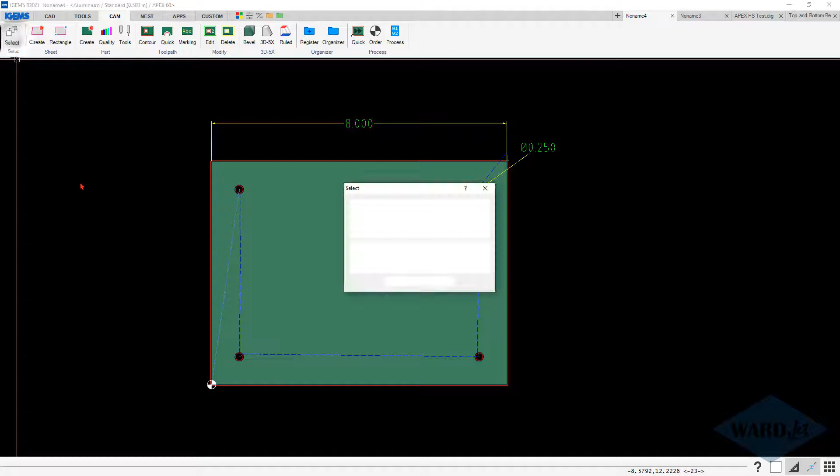So I've got this part programmed for 1/2 inch aluminum, and we're doing some 1/4 inch diameter holes in here. If we go into the material and edit the material, we have this fixed speed field up here, which normally is set to 39.37 by default. So what I'll generally do is set this to about 20% of my extra fine speed, and I find that that gives me a pretty vertical cut.

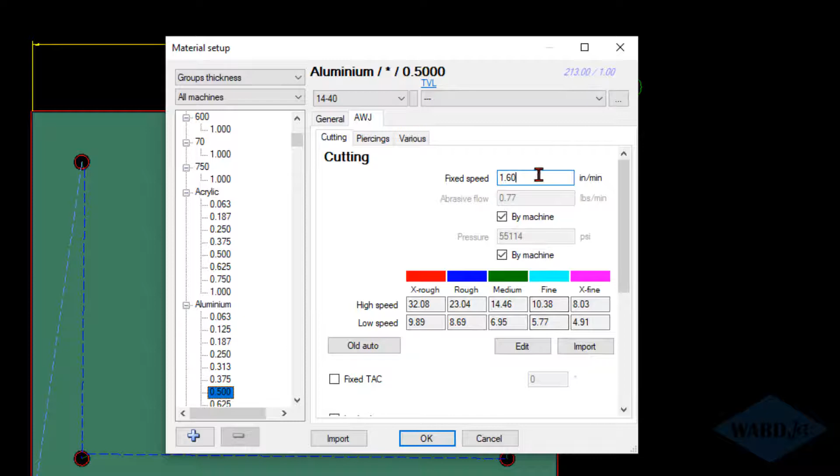As you get thinner and thicker, that ratio might change a little bit, but it's a good place to start in the typical range that people are doing waterjet cutting. So this essentially gives you a 6th quality to choose from, and then if you actually want to use that, we've got our toolpath added here already.

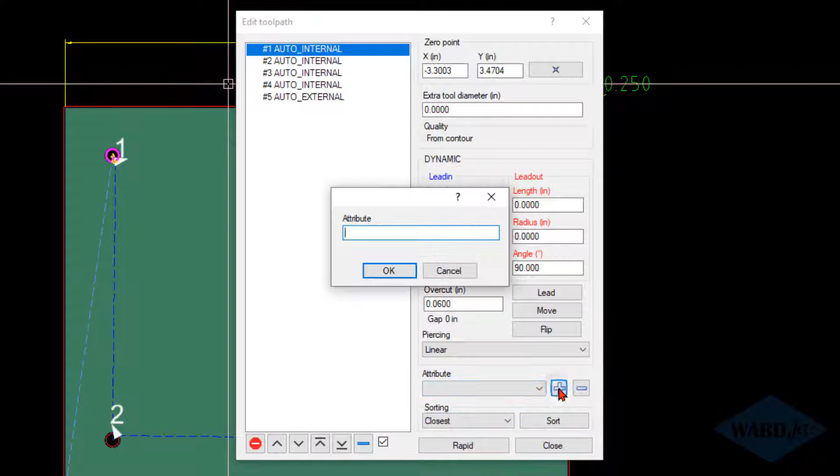If we click on the edit button, click on the part, come down to the attribute area, and if it's not already there, which in this case it's not, you can click on the plus button here and just type uppercase FS, and it'll add that to that cut, and then you can do the same thing to the other cuts. So then once it's in that pull down list, you can choose that.

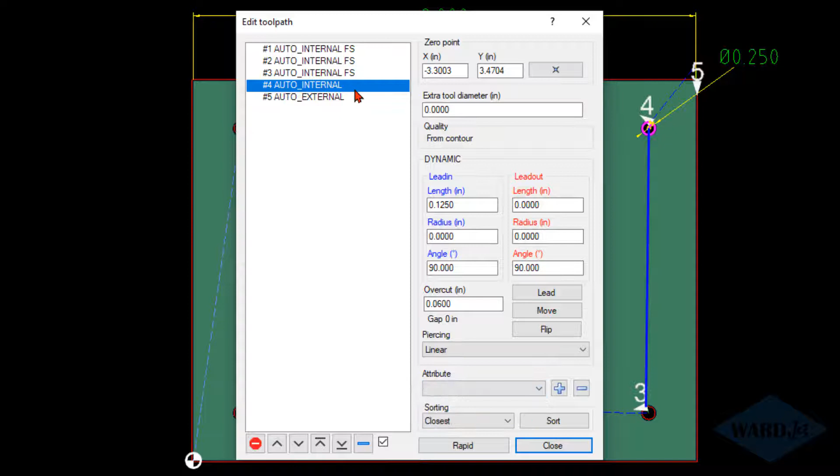If you decide that you want to remove one of these attributes, just hit the pull down menu and click on the blank field there, and that removes that attribute. And then we can, of course, put it back on again. You might also find as you cut these holes at the slower fixed speed that they're going to get a little bit larger because you are traveling so slowly.

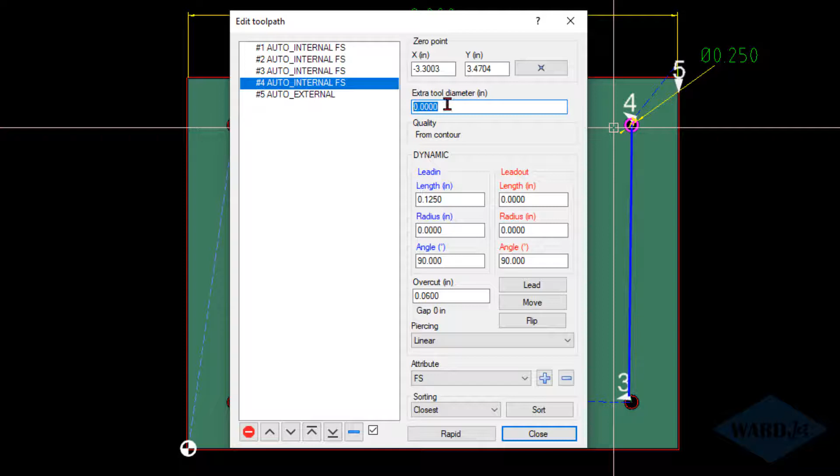So if that's the case, you can use this extra tool diameter field here to increase the tool offset on those holes. So if you cut the hole and found that it was 5 thousandths bigger, you can plug in 5 thou here, and if we zoom in on that hole, see that when I click out of that box, the toolpath moves in towards the inside to make that hole a little bit smaller by that amount. We can close this now. We can process this.

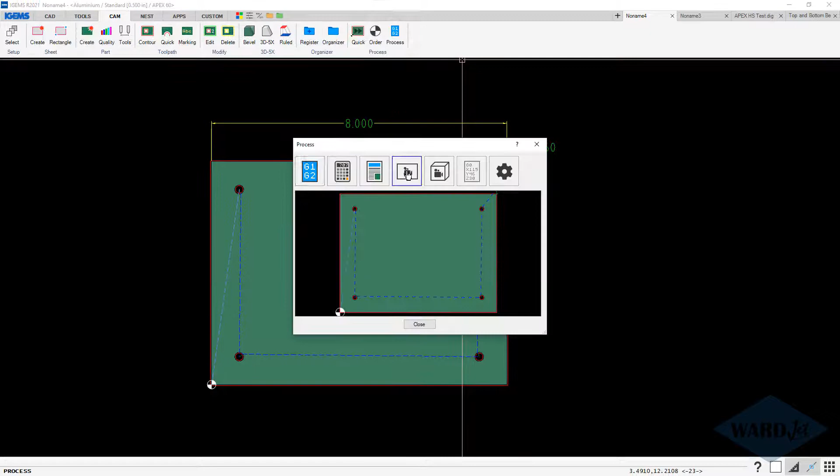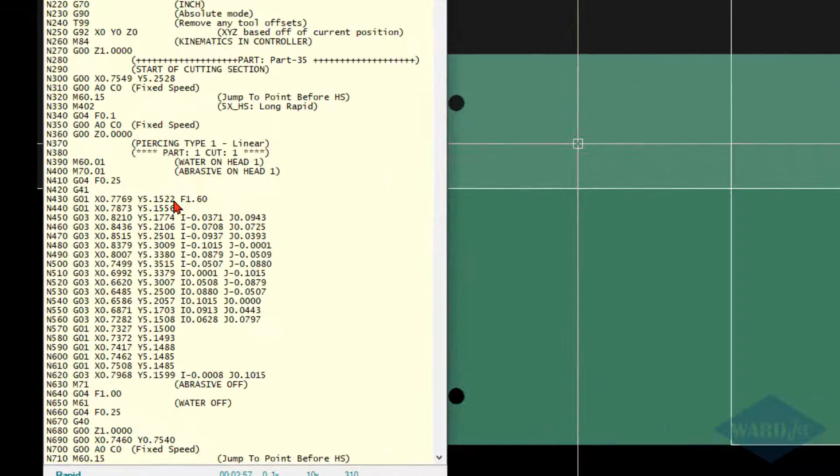It comes up with this little notification here to let you know that you've got a fixed feed rate in your part. If it comes up and says 39.37, then that'll clue you in that you haven't yet gone in there and set what you want to use for your fixed speed. And so now we'll see that it's going to cut this hole at 1.6 inches per minute, and it'll do that for all 4 holes.

So this can be useful for people that don't have a taper angle correction head like the Apex 60. It can also be used in conjunction with the Apex 60 head. You might actually find you get a better quality small hole doing this than sometimes with the taper angle correction.

With the ramping and the very slight changes in the A and the C axes, again, you might see some little deviations on the back side of the cut, and this can help to smooth it out, and it probably won't take much longer to cut it than if you did it with the taper angle correction turned on. So if you have any questions on that, let me know.